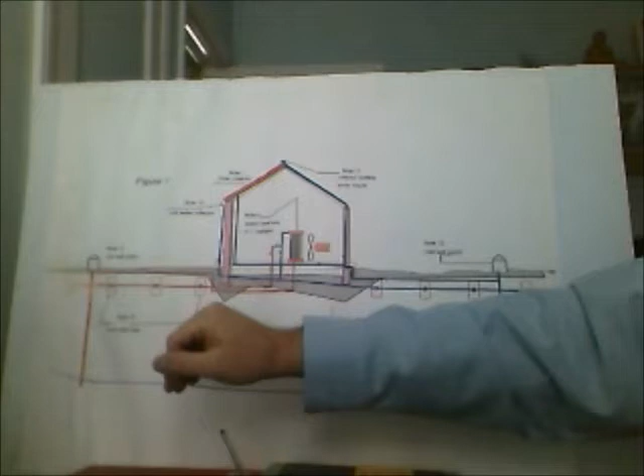So the plan from there was to put a solar collector on the house, pump water up through it and let it collect solar energy, and let that solar energy percolate down through the ground, heating the whole ground up. Then whenever I needed it, I could pump hot water to the radiator and heat the house.

So that's how practical solar was invented, or the idea was brought up.

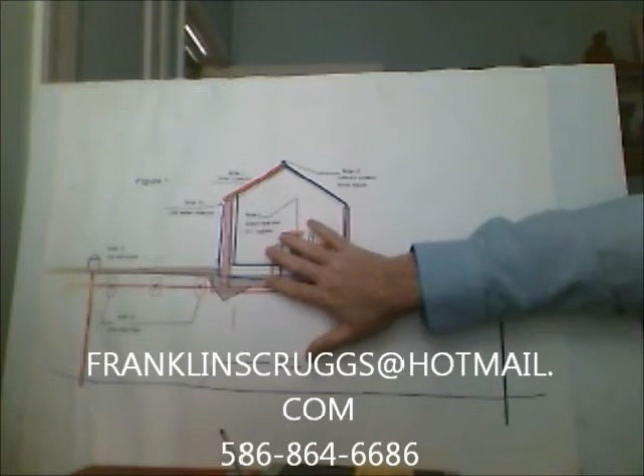The three major components are a solar collector, a way to exchange that heat with the house - in this presentation I'm using a dollhouse that has radiant heat in the floor - and you need a rock bed or drain field, something to simulate the earth, and a well pump.

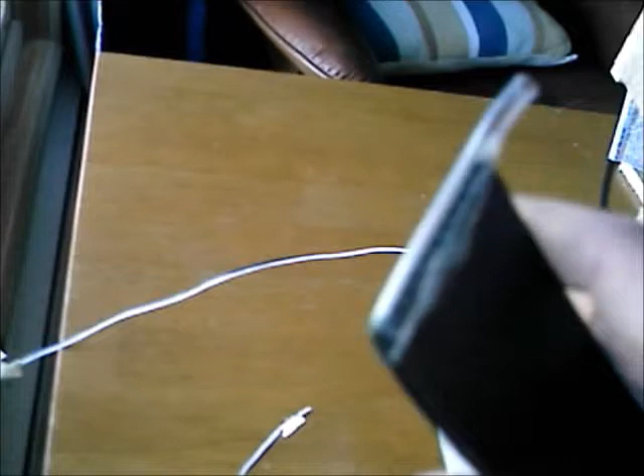Then I take this Coroplast and glue tubing to the ends of it so I can pass water through it. Then to insulate it, I use half-inch styrofoam. I put that on the back to keep the heat from leaking out the back of the collector.

To keep the heat from leaking out the front, I use a glazing material. This particular glazing material is polycarbonate.

Let me take the polycarbonate off. It's 2 layers of polycarbonate - another see-through kind of cardboard plastic.

So there you see the cat in the background, the tube that's glued to the polypropylene, polypropylene on top of the styrofoam, and this is all given structure with oriented strand board.

This oriented strand board is commonly used as a roofing material. The oriented strand board and the styrofoam cost about 60 cents a square foot together, and the polypropylene costs another 60 cents a square foot. That's $1.20 a square foot.

This glazing here costs $1.60 a square foot - more than the rest of the collector combined. If we can keep the price down on the solar collector, then we can sell a lot more of them.

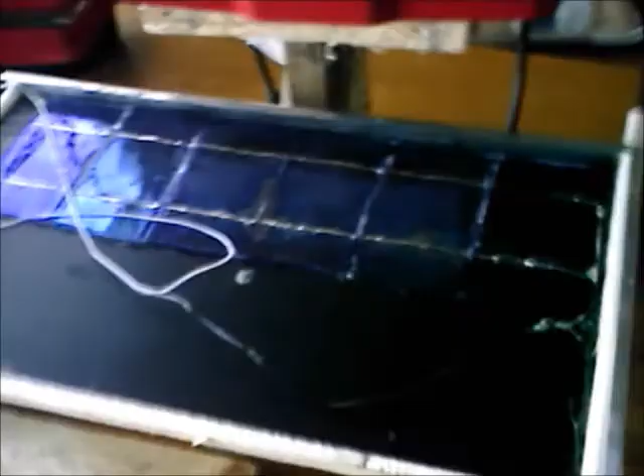This one has solar cells attached to provide power for my electric pump. We could also provide electricity for the house using this way, but we're not in this sample. We will talk about electricity in another video.

Now let's test this thing out. This solar panel is the same size as the one on top of the dollhouse. The water's being pumped by this - a kerosene transfer pump, normally made to run with 2 D-sized batteries.

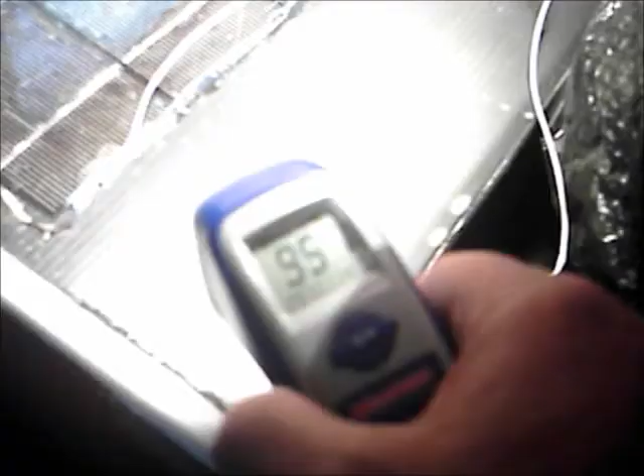Getting pumped into this side of the collector: 95 degrees, 96, 106.

My solar panels can collect $2 a year worth of thermal energy per square foot.

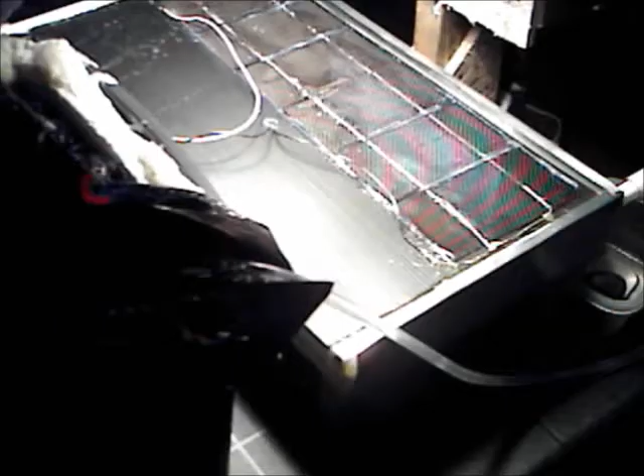Well, the light's been on for about an hour now. This side of the collector is reading 137. The water out is reading 110.

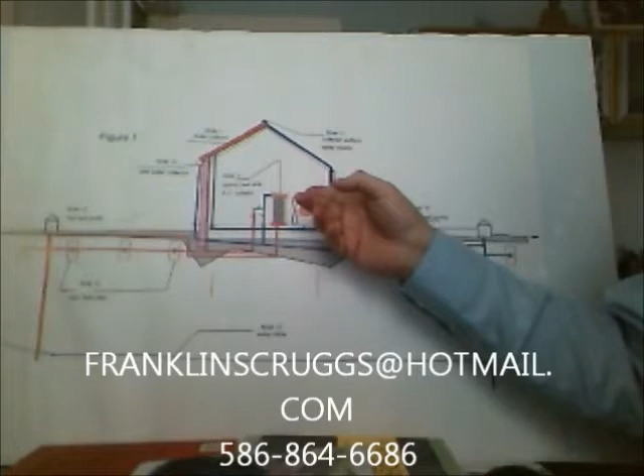So what's the big deal? Well, if you have a house with a $2,000 a year heating bill, you'll only need a 1,000 square foot collector. You would need one 4 times as big if you couldn't run it all year. But because we can store heat in the ground, we only need a tiny collector compared to normal.

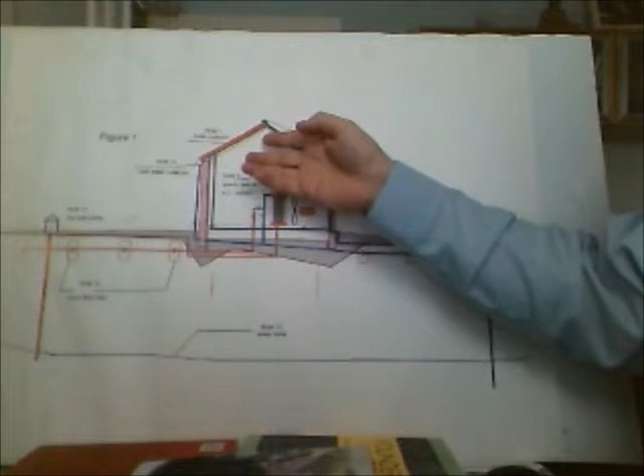So a plastic core collector of 1,000 square foot, even with the expensive glazing on it, is $3,000. If you have 2 pumps, 2 wells, and they're $1,000 apiece, that's $2,000 more.

So for a $5,000 system, plus controls and other labor of installation and whatnot, with a $6,000 system you would pay it off in 3 years at $2,000 a year. Well, a $6,000 system has a tax rebate of $2,000, so you only pay $4,000 - it would pay itself off in 2 years.

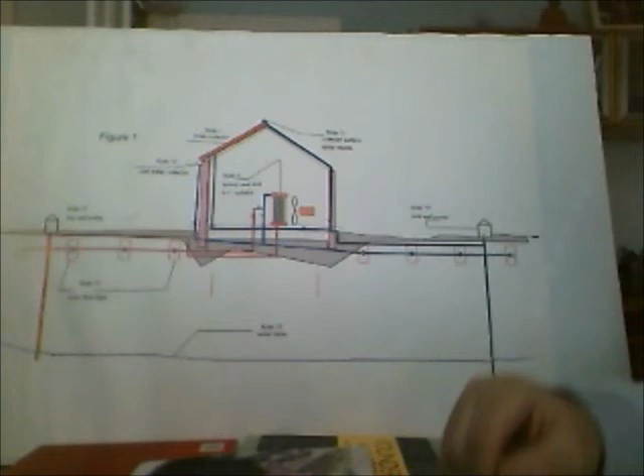You could purchase this with a credit card and have a lower monthly heating bill paying your credit card payments than installing a furnace system in the house.

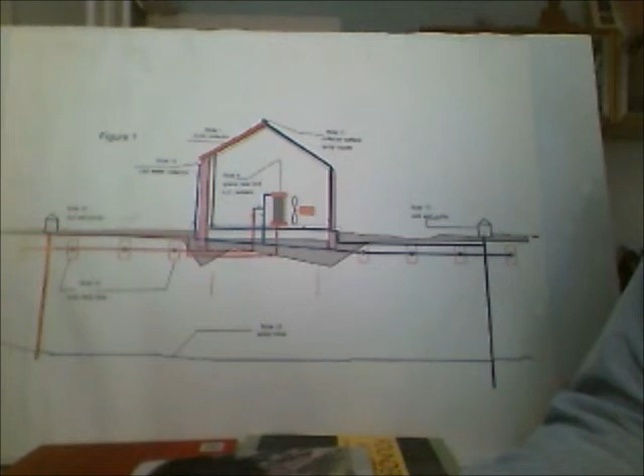When solar becomes so economically feasible that it's more feasible than burning fossil fuels, then we won. We will sell the majority of homes in America a system like this. The home heating market is $160 billion a year.

That means people that help me out in this system will probably do well. That's why it's a big deal.